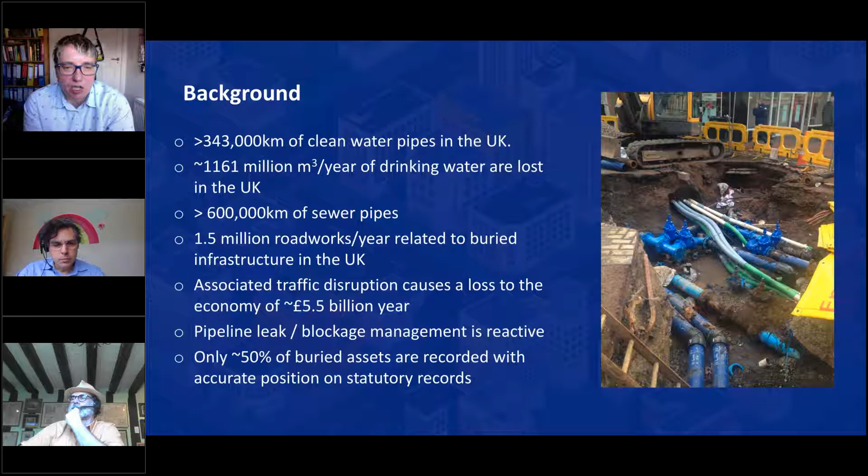So a bit more about the issues and the impact. I've already mentioned that there are lots of street works in the UK. So we spend about £7 billion per annum on utility-related street works. We do occupy the road quite a lot because most of this is through trenched activities. And this causes traffic delays. And we know that a large amount of street works are undertaken by utility companies alone.

Those are the issues, but if you look at the impacts, it's only 22% that are direct costs. 78% is indirect costs, including social and environmental impacts. So that's delays. That's also issues with where the water goes, where the leakage is. So that is quite a staggering amount that is indirect.

We know that about 6.16 million days of work in the UK was undertaken in 2014-15. So again, a huge amount. And we have a large amount of road openings. This is some information that was collected by Bob Gallion, former CEO of NJUG, which is now Streetworks UK.

But what all this means is that we still dig a lot of holes in the UK, and this incurs unnecessary costs. And there's also a safety issue, because if we don't know exactly where our buried assets are, then there's a risk to health and safety when we dig down, especially obviously with electricity cables, but also with water and gas.

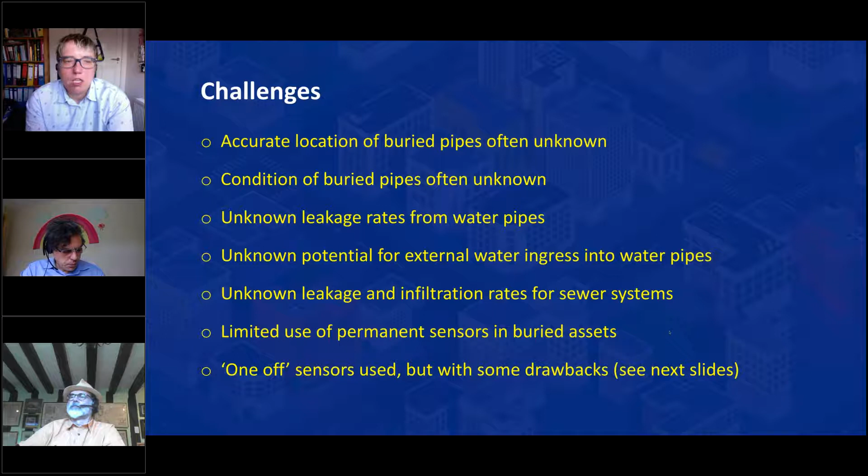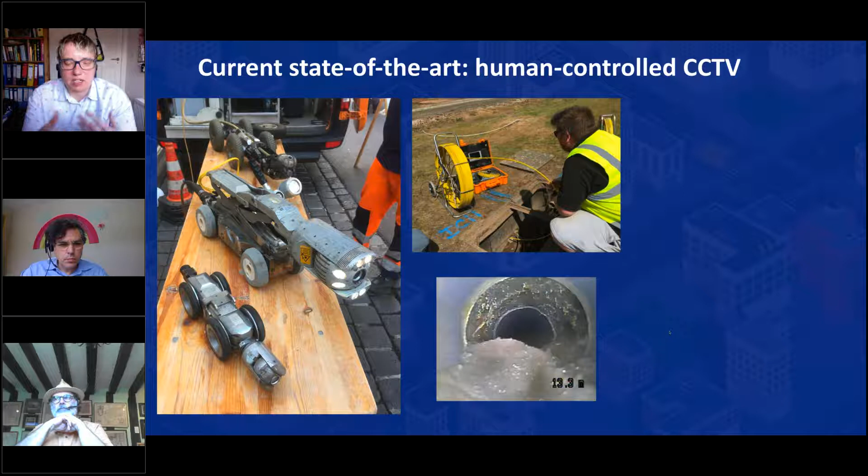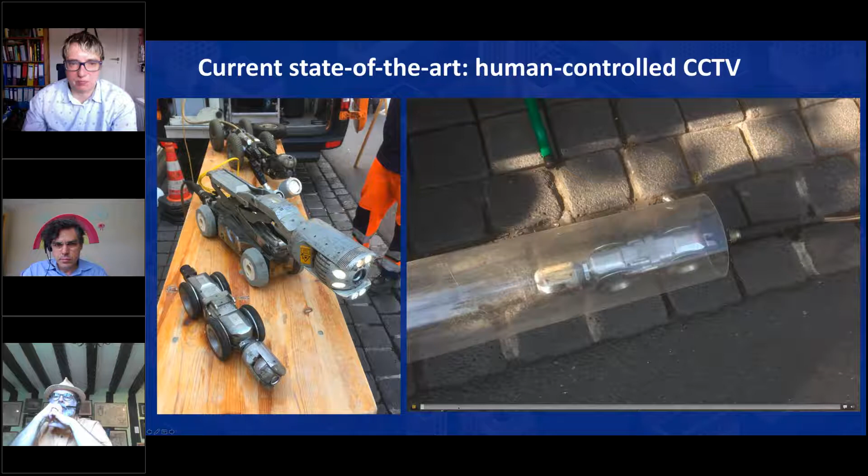So we've got a few robots that already exist. They tend to be tethered robots, and they've basically got really good cameras on them. You can see different sizes. Interestingly enough, I took these pictures at an open day in Hanover, an Explorer Day it was called, where they were showing this off, and also showing how they can jet wash pipes inside. And the activity was that you can actually blow balloons through the pipe doing that. Here's the picture of one of these robots going through the pipe system. There we go, that's just me recording it very briefly.

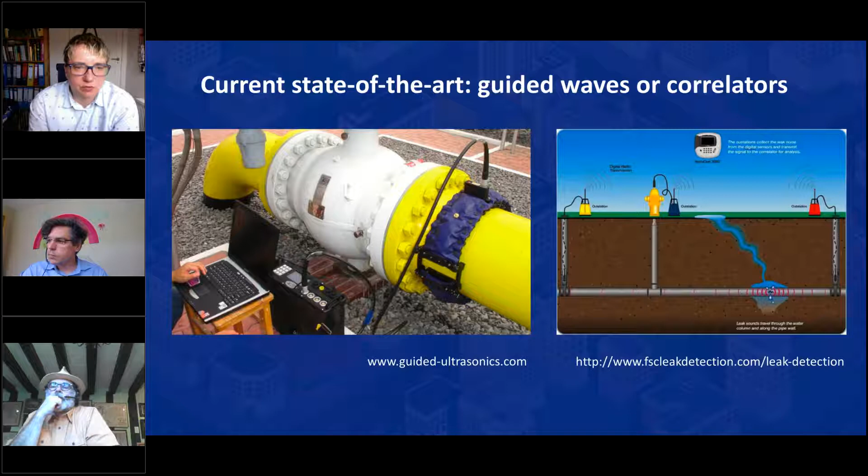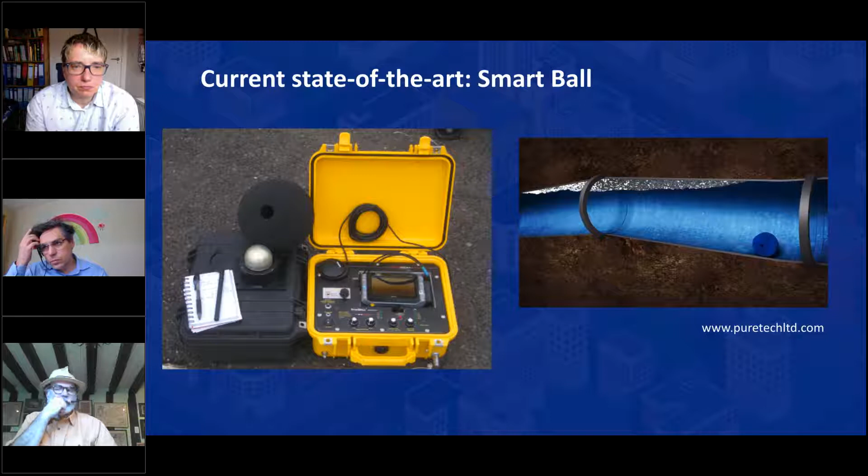We also know that we use guided wave correlators. So guided waves or correlators, basically an acoustic approach where we listen to the leak. So that's used quite a lot. But you do need to have access to the pipe system somewhere, the standpipe or a valve. There's a smart ball system which you can put inside the pipe, and it goes through and takes some measurements. There's also the Sahara system, which is a tethered system that, again, you can put into the pipes. It's an acoustic system, Kirill could tell you a lot more about it, which again tries to listen to deteriorations in the pipe system and also tries to detect leakage.

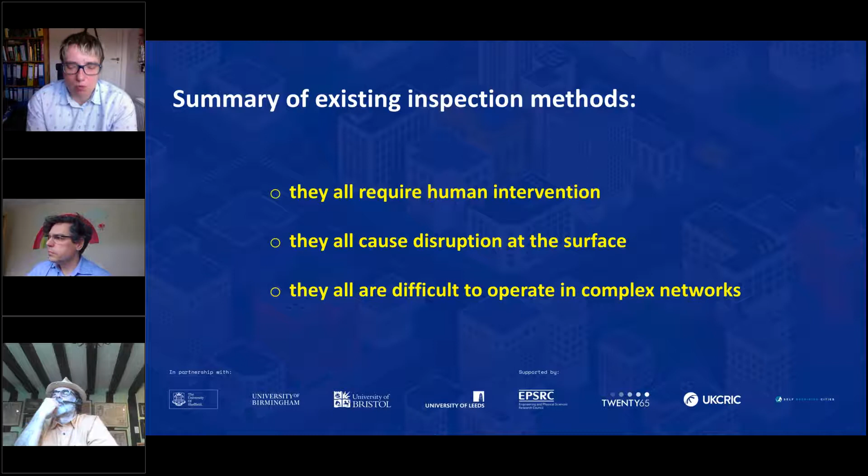But one of the challenges with all of these existing inspection methods is that they all require human intervention. So you basically have to go to site and place them into the system. They all cause disruption at the surface because you have to block off either a manhole, or an area, or even dig a trench to get to the pipe. And they're often quite difficult to operate in complex networks. So it's one thing if you've got a straight pipe, but if you've got complex offshoots, then they're often quite difficult to operate. And this is the sort of environment we found ourselves in when we came up with the Pipebots project. And I now pass on to Kirill, who will tell you all about what Pipebots is. Over to you, Kirill.

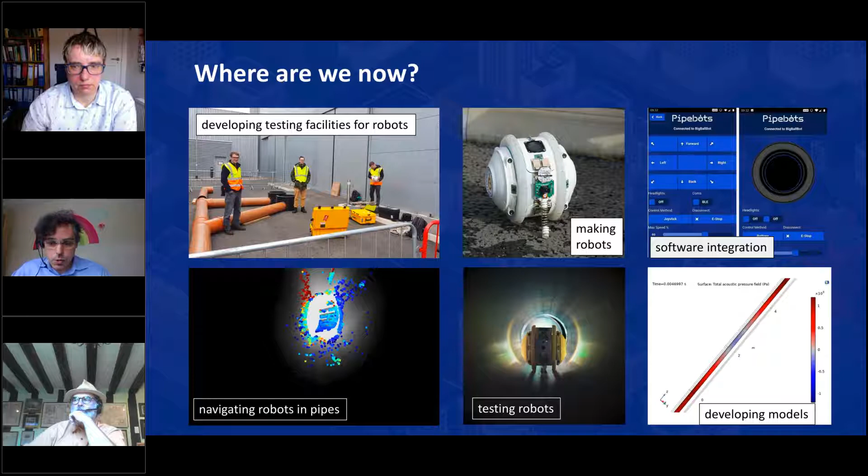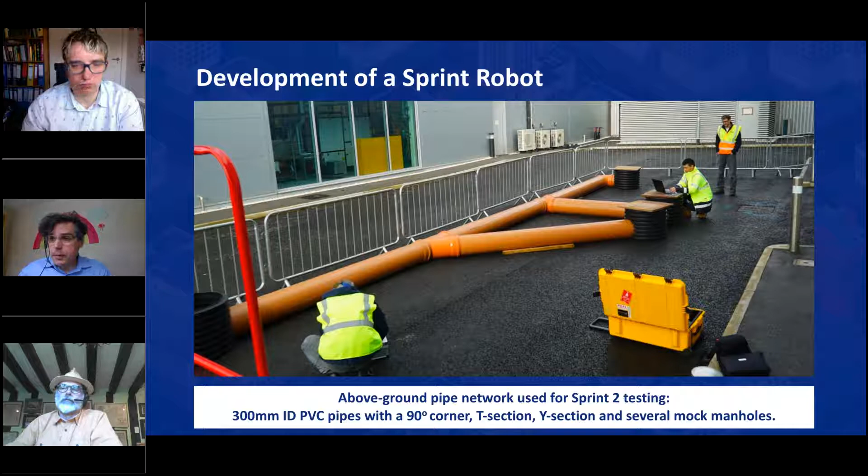This picture shows a blow-up of what was on the previous slide. It is actually a network which we built for one of our sprints, and sprints are a short activity which takes place to bring everybody in the team together. Particularly, Sprint 2 was to develop a robot prototype, which I think I'm going to show you on one of the next slides. Basically, one of those robots which you saw previously was tested in this network.

So how did we organize ourselves? We've got 7 research themes, and these themes, although they look independent, are designed to collaborate with each other. Theme 2 is to develop an acoustic or ultrasonic-based sensing system capable of measuring properties of the environment inside the pipe. Theme 3 is to build a mobile platform capable of fitting in the sewer and carrying the payload, such as sensors, for example.

Theme 4 is to do with a control strategy to make sure that we can get robots from point A to point B as one single node, but also make sure that all the nodes can collaborate together using some reasonable control system which can be deployed on an autonomous robot. Theme 5 is to do with navigation. As I mentioned before, this environment is feature deprived. GPS wouldn't work underground at all, or badly. Therefore, we need to develop a new mode of navigation in pipe using some bespoke system of vision and audio features. And this is the role of Theme 5.

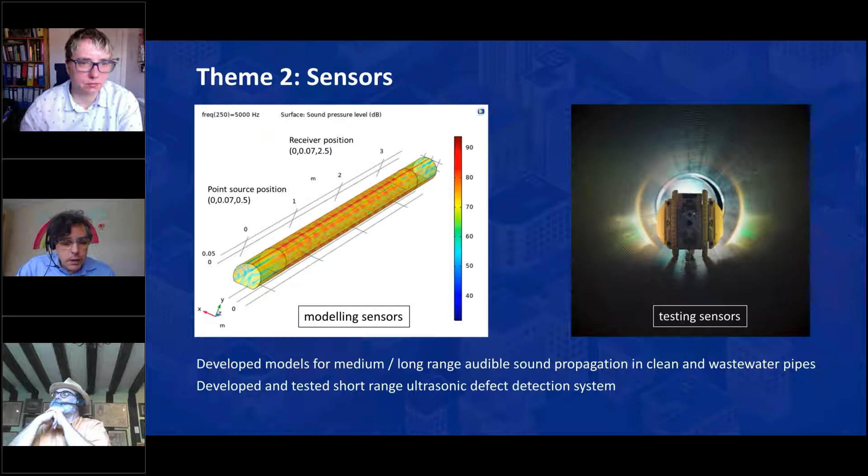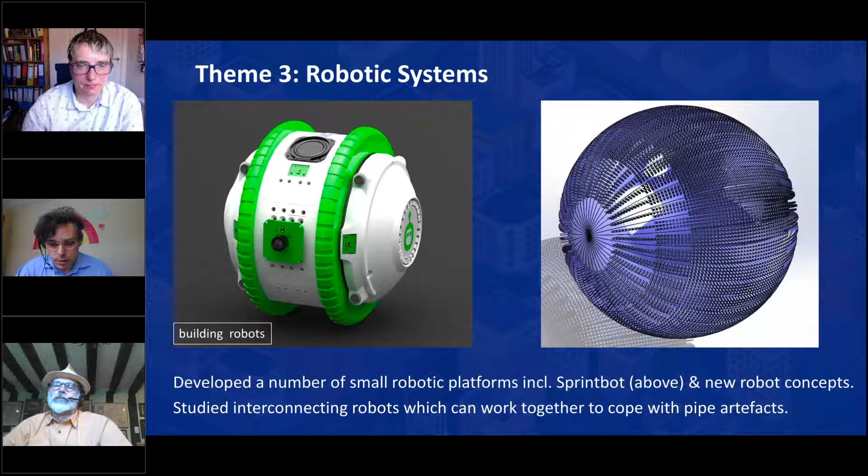This robot is actually in existence, but the robot, the Death Star on the right-hand side, is an impression of something we are building now, which is a fully sealed device with no moving parts on the outside, so it can be put in a more real environment and operate against the flow or in the presence of flow and other things, to move up and down, left and right. So this system was designed to cope with realistic pipes.

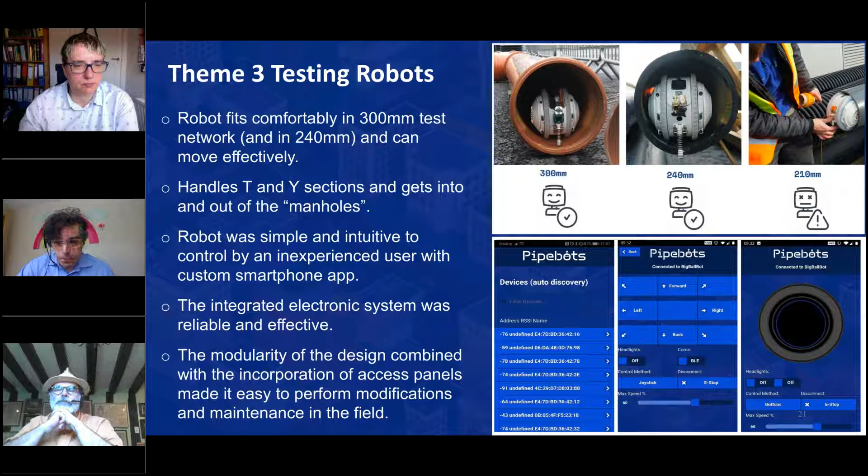The other thing in Theme 3 is to develop software which is intuitive and easy to use, which can control the robot. The pictures on the top show how this robot we developed fits in different sizes of pipe. It fits nicely in 300 mil pipe, but just about in 210. That requires this team to think about miniaturization, to make sure it can fit in pipes which are small. Also, the modularity of the design combined with access panels should make it easy to perform modifications and maintenance in the field, which is something we look into. Okay, next slide.

In the control theme, we need to get the robot from A to B, but the robot may also experience some difficulties going around obstacles. There has to be a reliable way to understand what's in front of the robot and what the control and actuator system will do to make sure it can move where it has to go. So it is a combination of low-level control, high-level control, and also control of a swarm as a whole. That theme is designed to communicate with Theme 3 to make sure that these controls are implemented on real prototypes which we're building together.

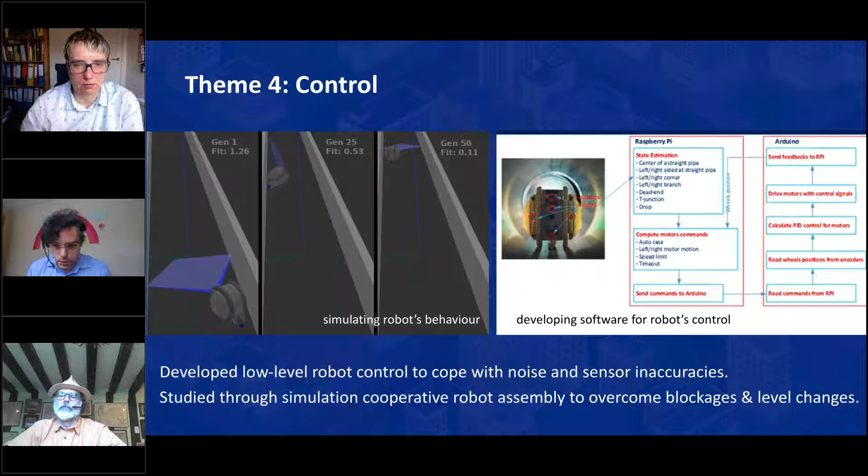Okay, next slide. As I mentioned before, navigation is a big issue. So if a robot doesn't know where it is and where it has to go, it'll be quite challenging for the autonomy to be working independently from human beings. So therefore, the navigation theme is looking at, first of all, mapping of the whole system or a big chunk of it.

And you can see on the left-hand side is actual digitization of an image taken in a real sewer with a real camera, and also the representation of that using a simulated map based on real data. And on the right-hand side, you can see a simulation based on anticipating where the robot needs to go and understanding what the uncertainties are depending on the algorithm for the navigation it uses.

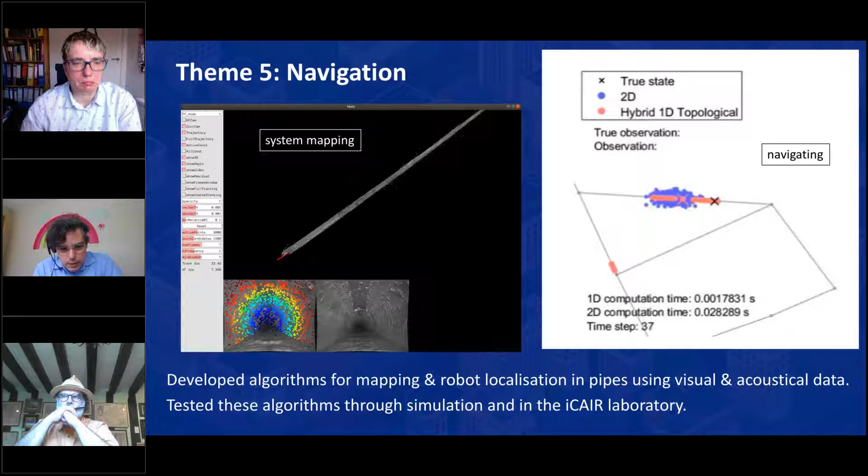So to summarize, this theme is designed to map and to localize the devices when they operate independently in the field. Theme 6, communication. Our simulation suggests if a robot has no communication, it's in danger of either just grouping up together and going like a big group on a pub crawl, or it's just getting completely out of order because it wouldn't know where to prioritize its movement to.

So therefore, theme 6 looks at how to send messages from robot to robot, how to get messages from above ground to instruct the robot to do things, and how to send data back above ground to make sure that operators know where the robot's been and what data they collected. And also the data on the status.

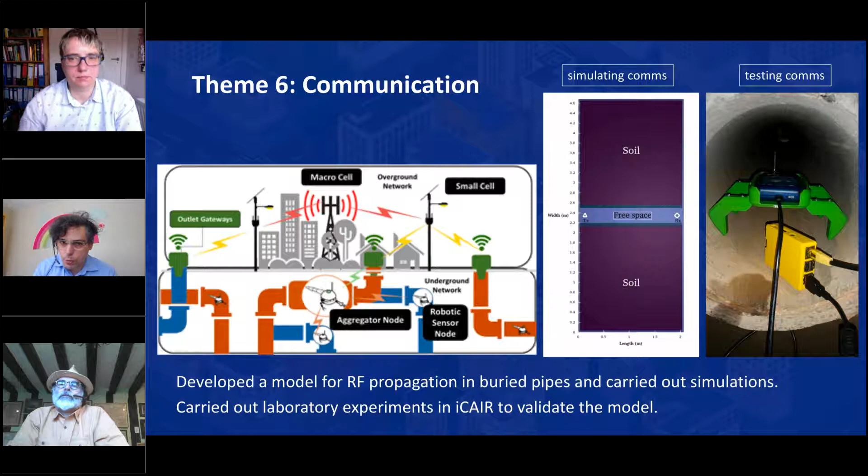It's quite a challenge because radio waves don't go very well underground, particularly in clean water pipes, which are pressurized and filled with water. Acoustic waves go better in clean water pipes, but there are also some issues in terms of the pioneering research to overcome. And that's the purpose of this theme. I think I'm passing you on to Professor Chris Rogers now. So from this point on, thank you.

Yep, you are. Hi. So Chris Rogers, some of you may know me because I've been working broadly in the field of and on behalf of trenchless technology for very many years now. What I want to do is just take what have been a very serious set of technical challenges that you've just been introduced to into the wider sphere of why we're doing it and why we should advance this as a way of addressing the issues of our buried pipelines.

And so we now have a responsibility to think about this valuable resource that we put enormous amounts of energy into to create clean water and then take dirty water and return it to the environment. So we have to marshal that resource responsibly, and we have to do it in such a way that it meets certain quality requirements, quite naturally, but we also have a responsibility to engineer our systems for the benefit of society and individuals and the economy that sits all around it. So we need to bring in these dimensions.